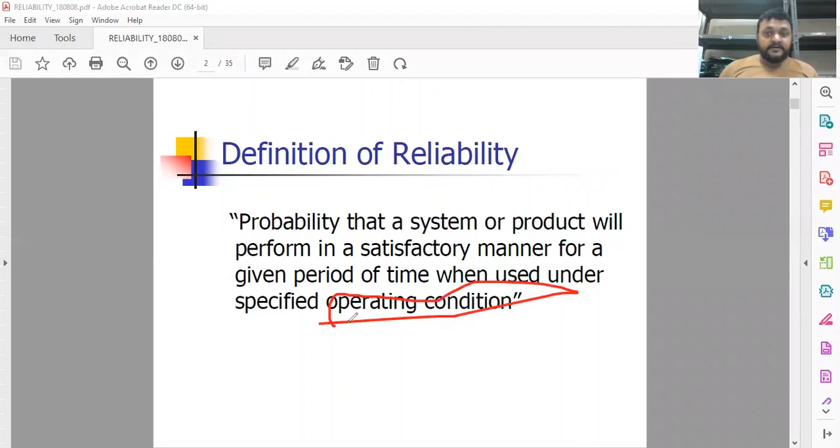So how we can decide the reliability is that it is a kind of probability that a system or product will perform in a satisfactory manner for a given period of time. So we have to decide a period of time to which a particular process runs or particular parts run under specific operating conditions. So you have to keep in mind the operating condition. Specified operating condition is one of the most important things with respect to time. So whenever you are deciding a particular product to be performed satisfactorily for a given period of time under a specified operating condition, then we have to decide the reliability.

And reliability is normally not an absolute number, but it is the probability. We have to measure the reliability in terms of probability, like 10%, 20%, or say 50%. So why this topic is one of the most important things is that normally it is better than quality, because quality gives only standards of how a particular product is complete in a specific operation, but reliability adds satisfactory performance, so it is better than quality. Normally industries are giving the reliability in terms of warranty. So warranty is nothing but a kind of reliability, we can call it.

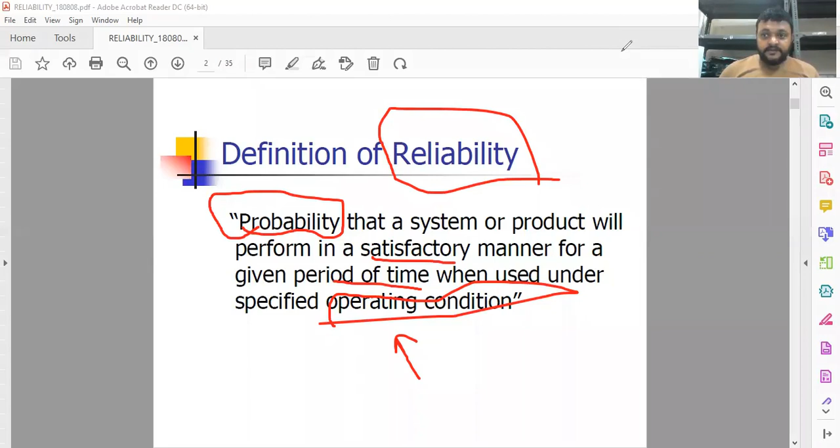Now we have to see how we can decide reliability. So what are the different elements of reliability that we have to see here? So reliability elements are like: probability is one of the important elements, a numerical number through which we can define the reliability. Also the second important element is satisfactory performance. So this is the criteria over which we have to decide whether a particular system or a particular product performed in a satisfactory way. So these are the components of reliability that you have to see.

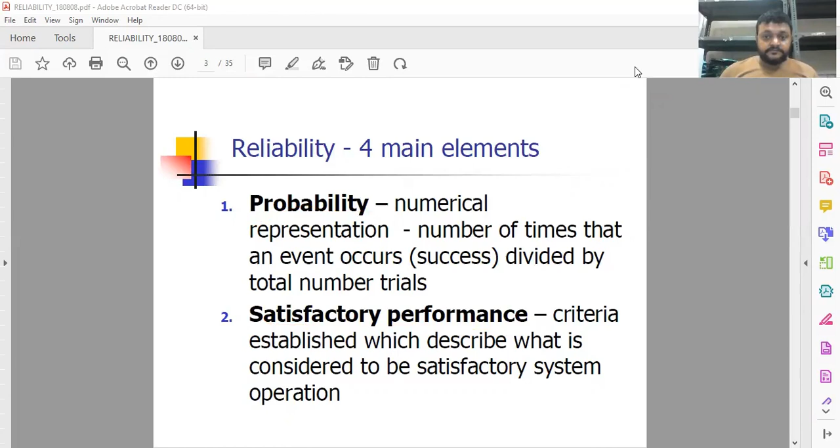Then another component is specified time. So the third important component is specified time. So we have to decide the prerequisite time over which a particular product or system or service is continuously performing. For example, we are purchasing a television, then they are giving us 1 year warranty. Say we purchase a mobile, then we are given a warranty of 1 year. So 1 year means without any failure, the mobile is working satisfactorily. And in between, if it fails to perform its designated function, then companies normally give replacement or free repair. So that is the specified time.

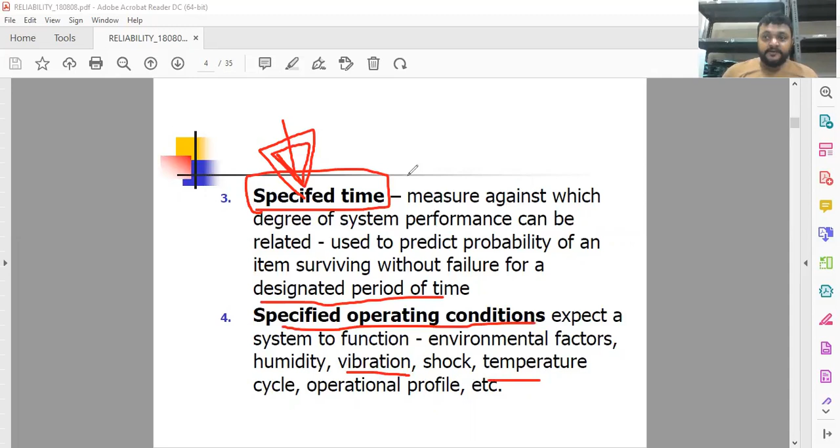And whenever you want to increase the value of your product, you have to increase the specified time in terms of giving more warranty. And the fourth important element is operating condition. So operating condition is like whether they are working under vibration, under temperature, or a specific operation profile. So these are the important elements of reliability over which we can easily define, predict, or calculate the reliability.

Now reliability is basically introduced by means of the life cycle curve, and that life cycle is normally shown by means of the curve called the bathtub curve. Why is it called the bathtub curve? Because the reliability or life cycle curves are in the shape of a bathtub, like this. So it is famously known as the bathtub curve, in which three distinct phases are there. The first phase is debugging, the second phase is chance failure, and the third one is the wear out phase.

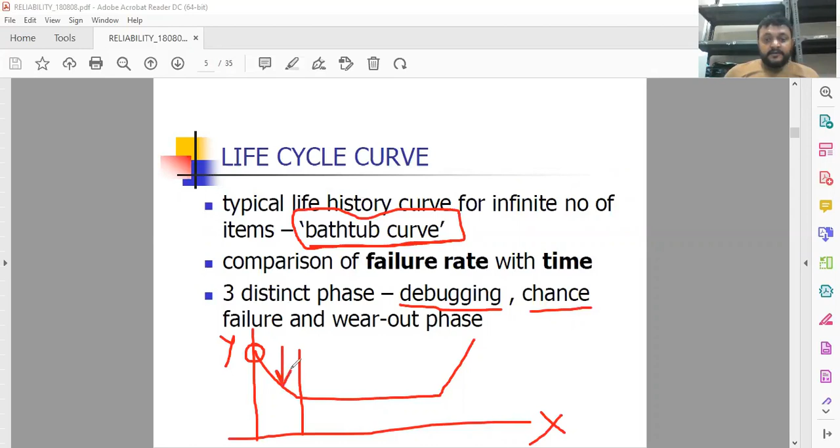So this is called the debugging. Debugging means when you start to perform duty of the product. This is the x-axis, and this is the y-axis. When the product starts to perform its function, then because of manufacturing defects, some starting torque and some starting vibrations are there, and because of that, infant mortality periods are there. So there are more chances of any product to fail at the initial level, and then it becomes saturated. So this is the initial condition or debugging period where there are more chances of infant mortality; with respect to time, the failure rate is decreasing.

Then we have the constant failure rate, and this is called the useful life period of any product. This is called the useful life period, over which we can simply consider it as the specified operating condition. Normally companies give the warranty in terms of this period. So this is the useful life period, and after certain operation of the product, some parts wear out, and because of the wear, there are more chances of the product to fail.

So they are now entering into the third zone, and the third zone is called the wear out zone, in which failure rate with respect to time is continuously increasing. So this is the increasing failure rate. The second region is called the constant failure rate, and the first one is called the decreasing failure rate, or you can call it infant mortality.

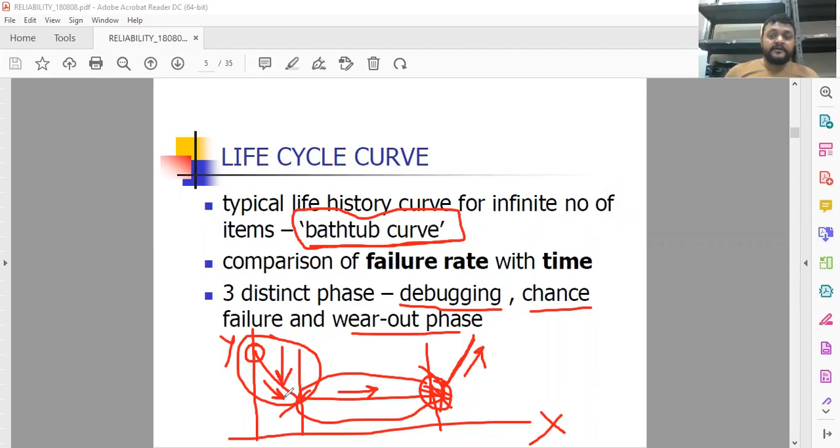Okay, so this is about the three parts of the life cycle curve that we are considering for understanding reliability. You can easily see that debugging phases are there, which we already discussed in the previous slide. Then the chance failure or useful life period is there, and the third one is the wear out zone, where you take failure rate on the y-axis and time on the x-axis to draw the diagram.

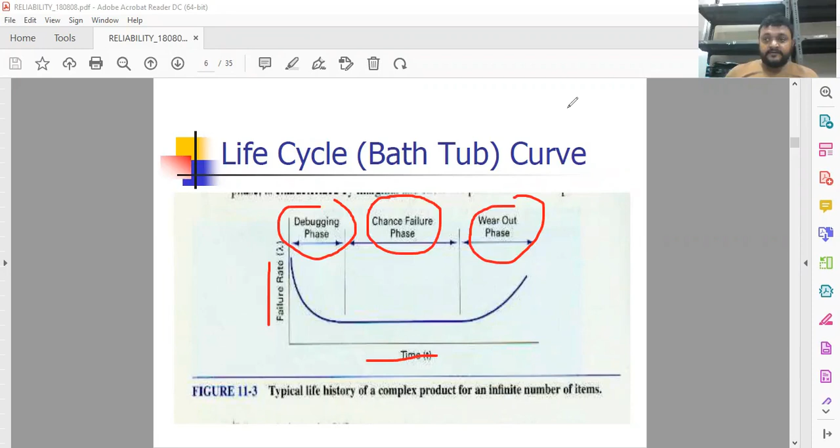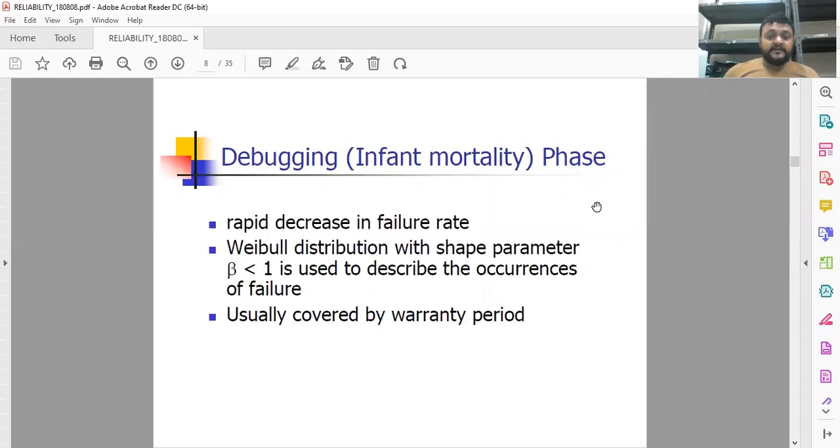And the sharp rise in failure rate is because of fatigue, corrosion, or wear, where chances of the product to fail after entering this region are considerably very high, and normally they are not covered under the warranty period.

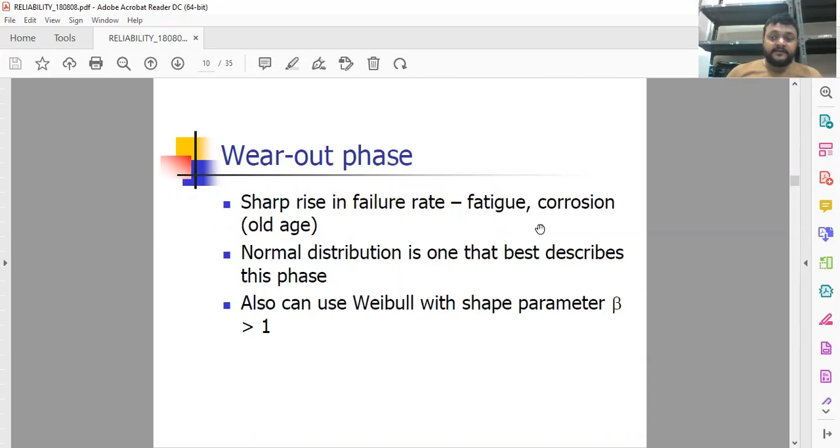And this is about the Weibull distribution interpretation, where based on the value of beta, we can cover how infant mortality is there. Beta less than 1, and beta equal to 1, where an old part is as good as a new one. You can see here failure is very random, so the old part is absolutely good. No need to replace up to beta equal to 1. Once beta is more than 1 but less than 4, then low cycle fatigue is there, and corrosion or some wear out occurs.

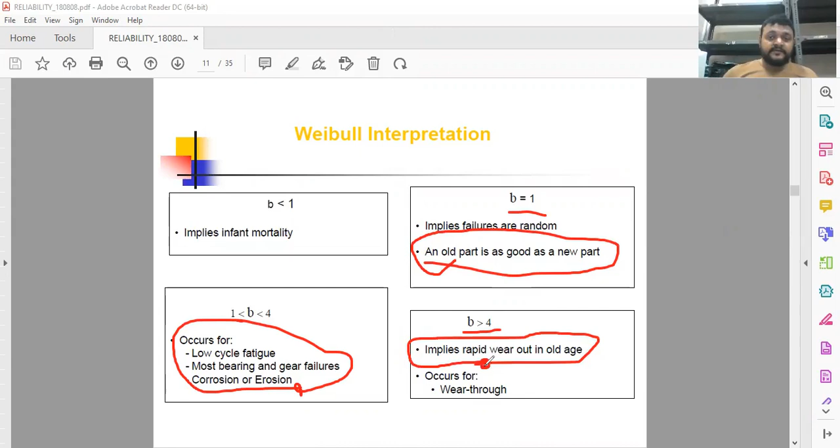So it is likely to start towards the failing zone, and once beta reaches more than 4, it enters into the rapid wear out zone, and here we have considered the replacement. So a new one is better than running on the old part. So this is about the Weibull distribution based on the performance of the product for understanding the probability of failure.

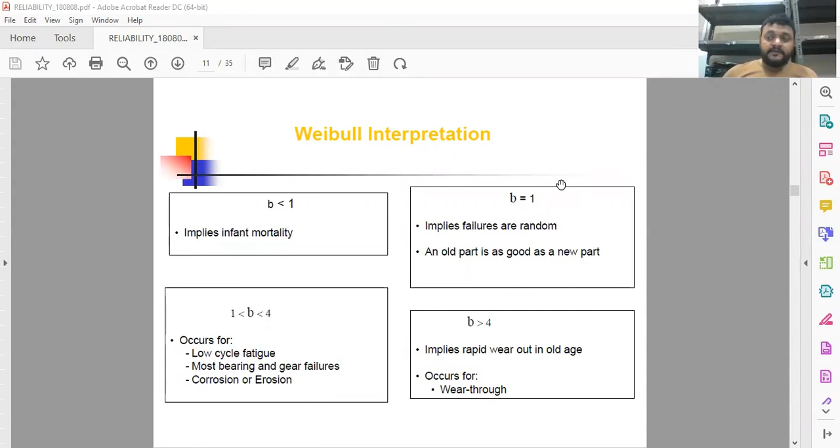Now, another important term is maintainability. Normally we are deciding chances of failure, degree of detectability, and severity. But severity is a very simple term, and we are likely to convert the severity into maintainability. Normally, we have three important parameters that you have to keep in mind. One is the chances of failure: how a particular product has the chance to fail.

If chances of failure are more, then we consider it a critical part, and if chances of failure are less, then we consider it a less critical part. The second one is degree of detectability: how easily we can detect the problem inside the product or system so that we can prevent sudden breakdown. Same way, if degree of detectability is less, then it is considered a more critical component.

And the third one is severity. Chances of failure, C. Here you can see the chances of failure C. Then degree of detectability, for example D, and severity. Severity means the effect on the product or system when it is failing.

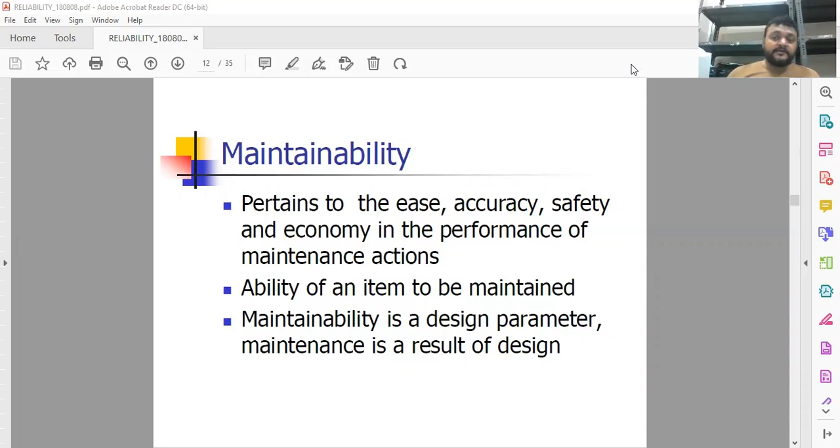Before deciding the maintenance of any component, we must reach the root cause of the failure. Once you reach the root cause, you can identify the problems, causes and effects, why the component failed, and try to reduce that type of failure so that ultimately maintainability is improved. And if maintainability is improved, automatically your reliability is improved. So reliability and maintenance are always associated with each other.

Now, for measuring maintainability, we must convert it into mathematical form, because maintainability is not a theoretical word; it is a mathematical word. To measure maintainability, you must keep some parameters in mind. That is mean time between failures, the time between two consecutive failures. Once you know the MTBF, you can find out which type of maintenance you have to go for, because there are lots of types of maintenance.

Breakdown maintenance: when a particular material fails and you start to repair it, it is called breakdown maintenance. The second type is civil maintenance, like whitewashing the wall at home in the festival season, or lubrication of a component. But the third and fourth types are important: preventive maintenance and corrective maintenance. To decide these, we should know the mean time between maintenance, so you must have knowledge of the frequency of failures.

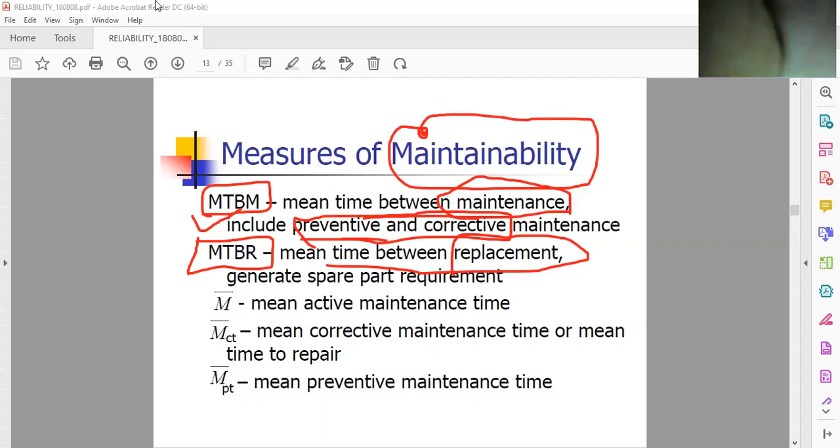Bearing is one of the most important and critical components in mechanical engineering and all major processing industries, where replacement is 100%. But not every component has 100% replacement. So depending upon the requirement or working of the product, we decide whether to go for maintenance or replacement. Unnecessary replacement will introduce cost. So these are the terms based on which we can calculate maintenance. Now we will see another type of maintenance.

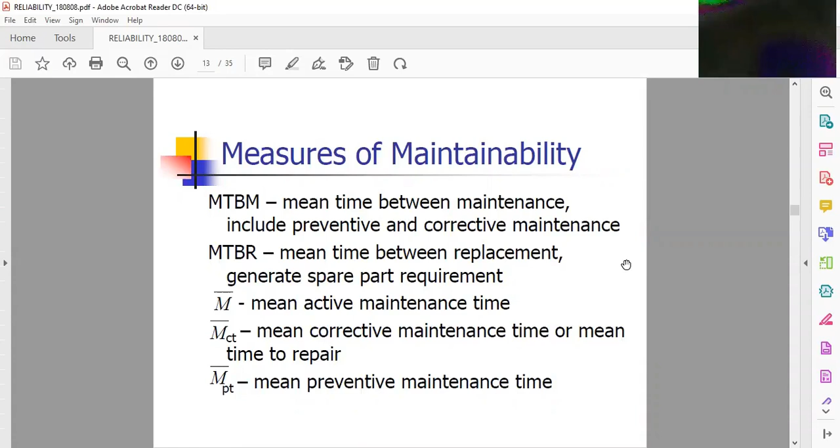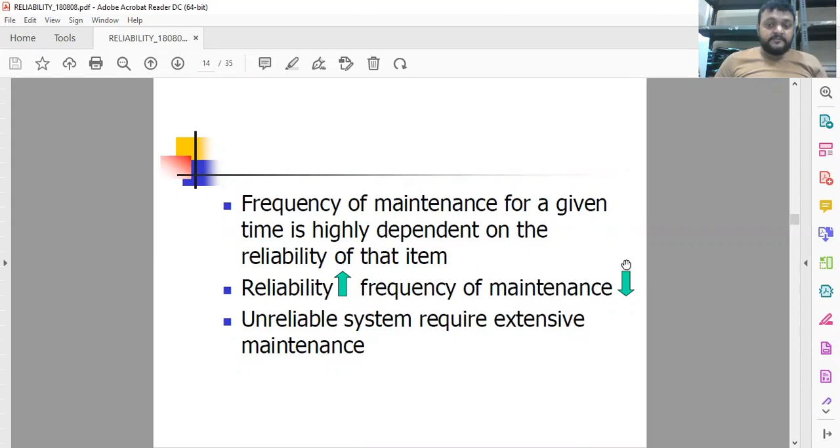Frequencies of the maintenance that I have already discussed, that number of frequencies of failures are needed for deciding the maintenance and replacement. An unreliable system requires extensive maintenance. So reliability function is nothing but 1 minus F(t), where F(t) is the probability of the system. Mathematically, reliability is defined as R(t). R(t) is the reliability function.

So reliability function is equal to 1 minus F(t), where F(t) is the probability the system will fail with respect to time t. So 1 minus probability of the failure is called reliability. For example, say a particular component has a probability of failure of 10%: out of 10 times, it failed one time, so the fail probability is 10%. Then reliability is 1 minus 10%, means 90%. 1 means 100%.

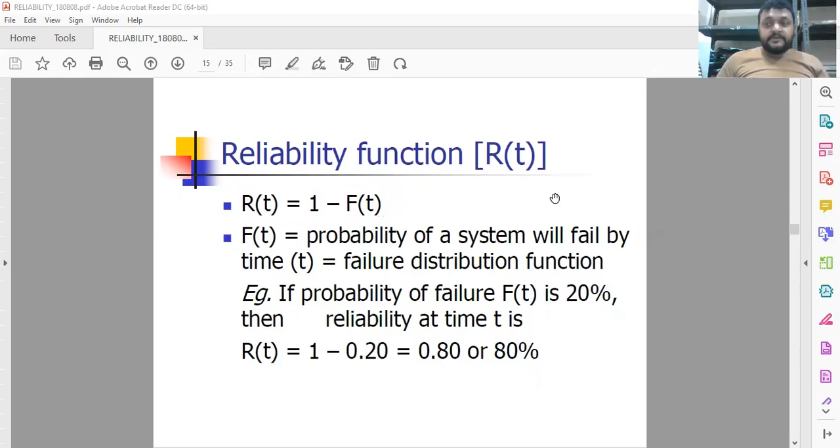So if the probability of failure of a particular component is, for example, 20%, then we consider R(t) as 1 minus 0.2, or 0.8, or 80%. So by this we can easily convert reliability into mathematical terms, because we must have the knowledge of measuring reliability. Without measuring reliability, we cannot enhance the system performance. So this is about the characterization of reliability in terms of mathematics.

In exponential form, R(t) is equal to e raised to minus t by theta, where theta is the mean time between failure, and lambda is the failure rate, 1 by mean time between failure. So theta is nothing but the MTBF. So failure rate is nothing but the inverse of the mean time between failure.

Or in another term, we can equate the reliability as R(t) is equal to e raised to minus t by theta, or e raised to minus lambda t, where 1 upon theta is equal to lambda. And 1 upon theta is nothing but 1 upon MTBF, mean time between failure for any particular component. So this is about reliability in terms of mathematics.

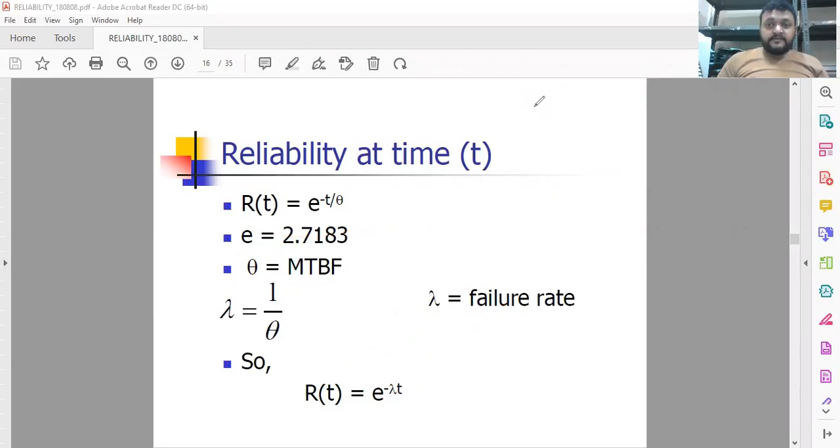Now failure rate is what? Lambda. Lambda is nothing but the number of failures divided by total operating hours. For example, say a particular component has total operating hours of 1000 hours, and in those 1000 hours it failed 10 times, then 10 divided by 1000 is called lambda. That is the failure rate, or we can consider it as 1%. So lambda is nothing but the percentage failure rate.

So total number of failures divided by total operating hours. Say total operating hours is 1000 hours, out of which a particular component failed 10 times, then we consider the percentage failure rate. So this is about the failure rate.

For example, say 10 components were tested; the components are non-repairable and failed as follows. Component 1 failed after 75 hours, component 2 after 125 hours, the third after 130 hours, the fourth after 325 hours, component 5 after 525 hours, and so on. How we can find out the failure rate, I will show you. You have to see each and every component: first, second, third, up to the fifth one.

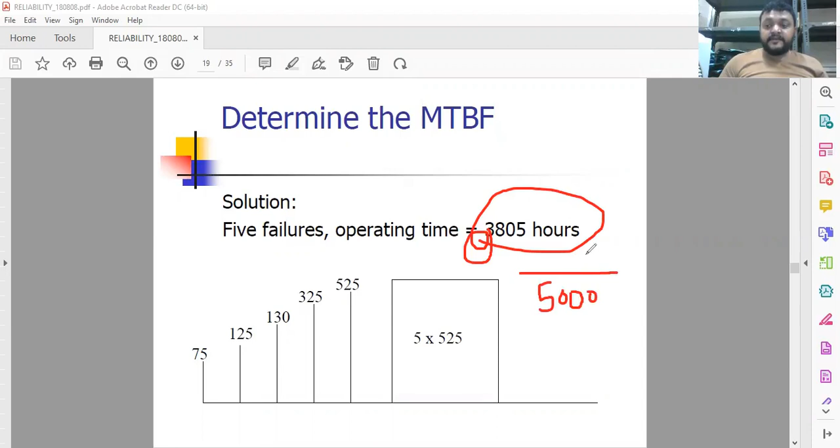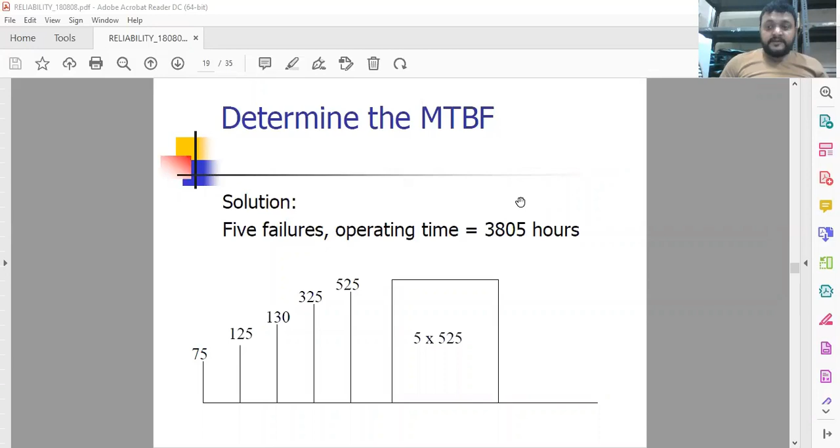And you have to take it for a particular product or a particular component. Say total operating hours is 5,000 hours, for example, and it has failed 10 times, then you have to put it as 10 by 5,000. Okay, so that is the failure rate. This is how you can find out the failure rate. So for failure rate you should have knowledge about the total operating hours and number of failures.

Now, MTBF is nothing but the reverse of the failure rate. Failure rate is the number of failures divided by total operating time. Number of failures means first time it failed, second time, third time, and fourth time, because downtime is shown each time here. So total operating hours is 136.9. And I have put number of failures as four because four times in the previous chart a particular product failed and entered into downtime.

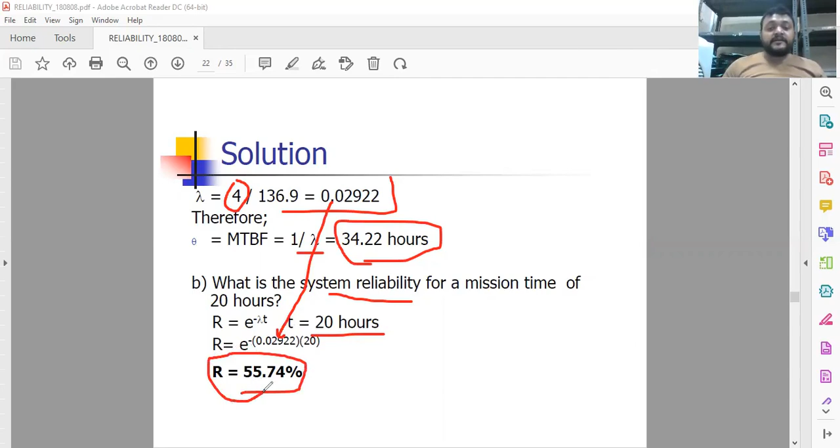So reliability is 55.74%. So approximately 45% time is wasted here. So to improve the reliability, we must reduce the downtime and improve the operating time. Now, how can we improve the reliability? Suppose you want to improve the reliability, you must improve the failure rate. So operating time is to be increased or reduce the number of failures.

So that automatically lambda is decreased. Lambda is decreased, then mean time between failures is increased. This product will increase and give a higher value of reliability. So try to reduce the downtime or increase the operating time so that we can improve the reliability of any product. So this is about the correct understanding of reliability.

Now, whenever we are modeling a number of components in a system for actual industry, there are lots of components. For example, I will give you the simple example of a refrigeration system. In a refrigeration system, we have a compressor, then condenser, then expansion valve, and evaporator. And all these components are joined in series to produce the refrigerating effect.

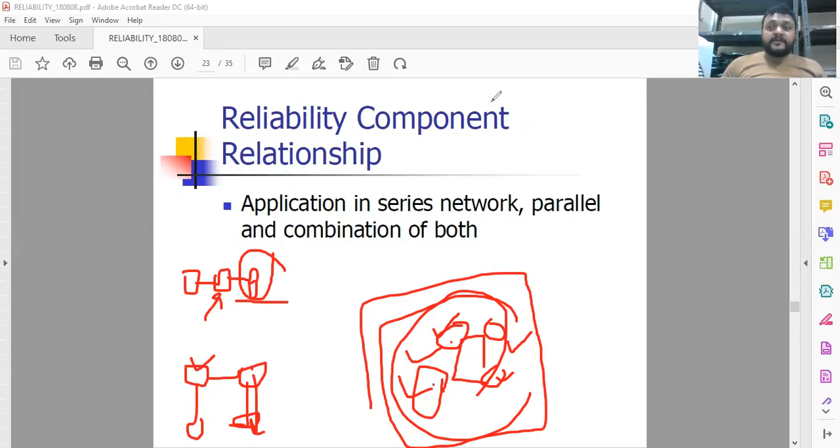Then if this component is failed, this particular component or this parallel line is working. So reliability is different. So depending upon the arrangement of the component, whether in series or whether in combination or whether individually in series and parallel, reliability affects. So you have to keep in mind about the relationship of reliability components, how they are joined together: series, parallel, or combination of both.

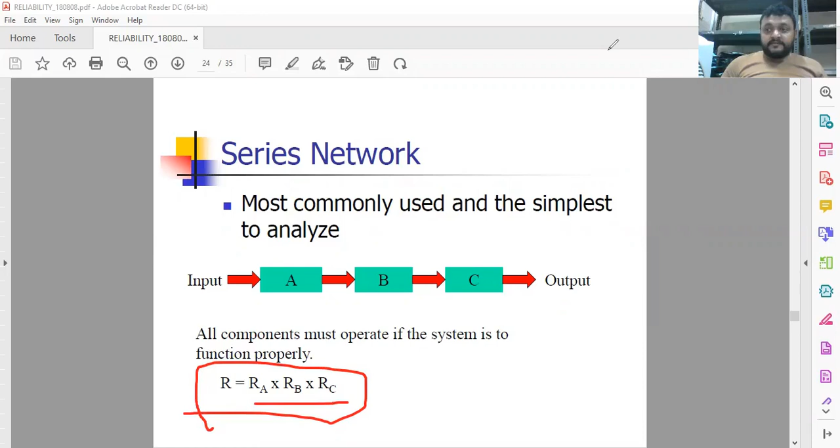Okay, so this is series network. Very simple thing is there. This is series network where we have seen that overall reliability of the system is multiplication of reliability of individual components. And in terms of exponential form, e raised to minus (lambda 1 plus lambda 2 plus lambda 3 plus up to lambda n) into t, where t is the total operating time, and lambda 1 to n is the number of components.

For example, just have to see now the example. This system is expected to operate for 1000 hours, and it consists of 4 subsystems in series: system A, system B, system C, and system D. And mean time between failure of all the systems are given. So you can easily find out lambda A, lambda B, lambda C, and lambda D by the reciprocal of the MTBF given. And based on this, we can easily find out the reliability. So this is the simple example of calculating the reliability of system in series.

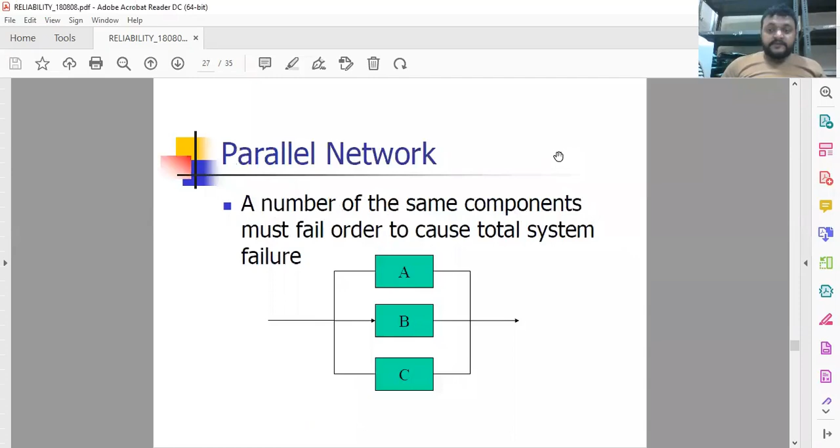Another example is parallel network. So parallel network is like this, and for that reliability is different. So this is the reliability of parallel system: reliability of A system plus reliability of B system minus multiplication of both. So this is the different calculation of the reliability if they are in parallel. So that is the difference. In series, they are simple multiplication, but here you have to add reliability and then minus multiplication of both the reliabilities. So this is about calculating the reliability when they are working in parallel mode.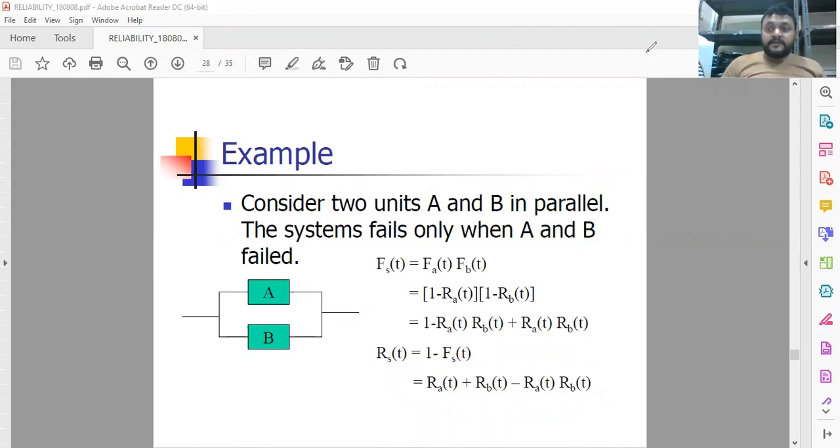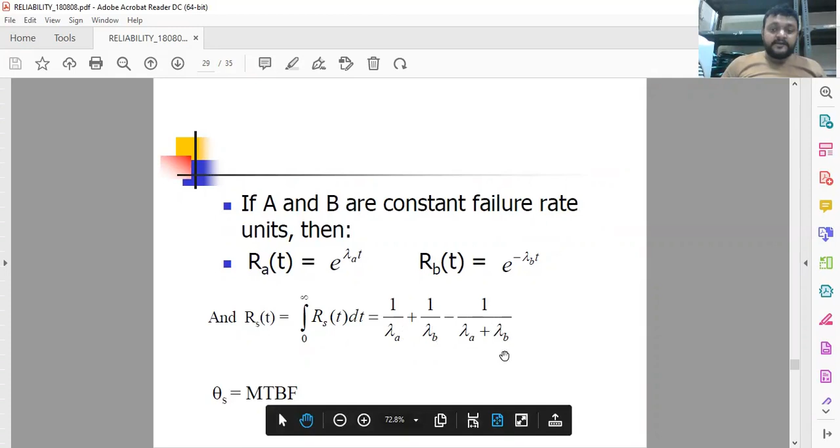Likewise, MTBF of the system associated in parallel is equal to 1 upon lambda A plus 1 upon lambda B minus 1 upon lambda A plus lambda B. Okay, so this equation you have to keep in mind for calculating the reliability of parallel. If there are three systems, then system reliability in parallel is 1 minus (1 minus RA) into (1 minus RB) into (1 minus RC), and so on, (1 minus Rn), where n is the number of components associated in the pattern of parallel scheme.

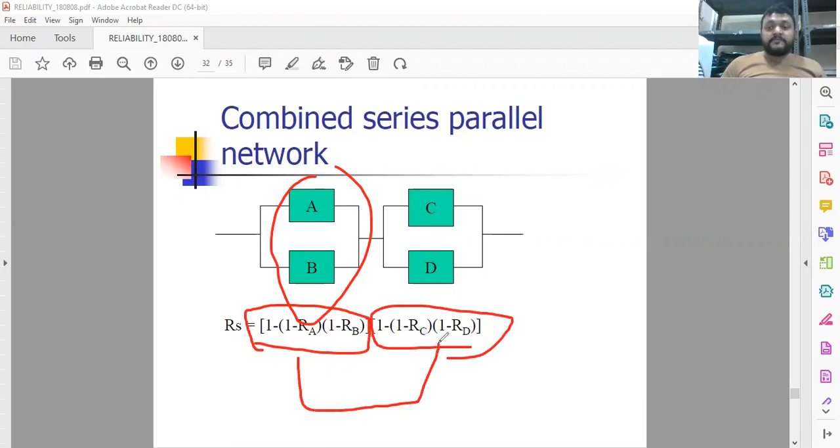And here you can see one of the most important things. Two parallel systems A and B. So they are calculated separately in another form of the equation. And this is for C and D as they are in parallel. And outcome of both is in series, so multiplication of both. So this is the way how you can calculate the system reliability, whether they are in series or in parallel. And more complex systems may be there. I will give you the example in upcoming tutorial to calculate the reliability of complex system. Okay.